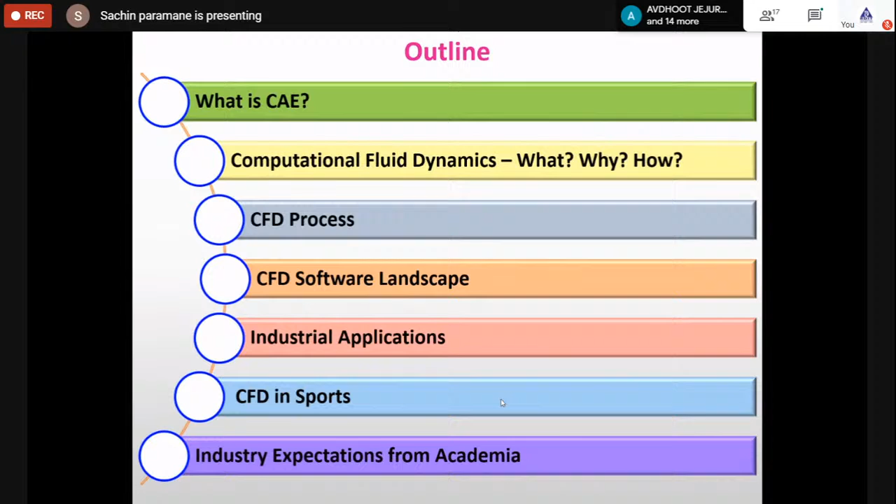I'll be happy to answer those queries, and that will be the end of the presentation. I will try to cover this in 1 hour 10 minutes, and then we'll have the question answers. So first, what is CAE?

Basically, CAE is a technology which is concerned with the use of computer systems to analyze CAD geometry, allowing designers to simulate and study how the product will behave, so that the design can be validated, refined, and optimized.

CAE is nothing but the use of computational resources, computational systems to model the geometry, analyze, simulate, and understand the behavior of the product in particular conditions, or particular environmental or operating conditions in which this product will be used. So this is nothing but CAE.

Nowadays CAE is an integral part of any product development cycle. If you talk about any industry, CAE plays a major role in the product development cycle, where CAE is applied for improving the performance of an existing product or designing a new product. The design is validated on computer, then taken for prototyping, and finally launched in the market. So this is the product development cycle. You can name any product where CAE is used on a large scale.

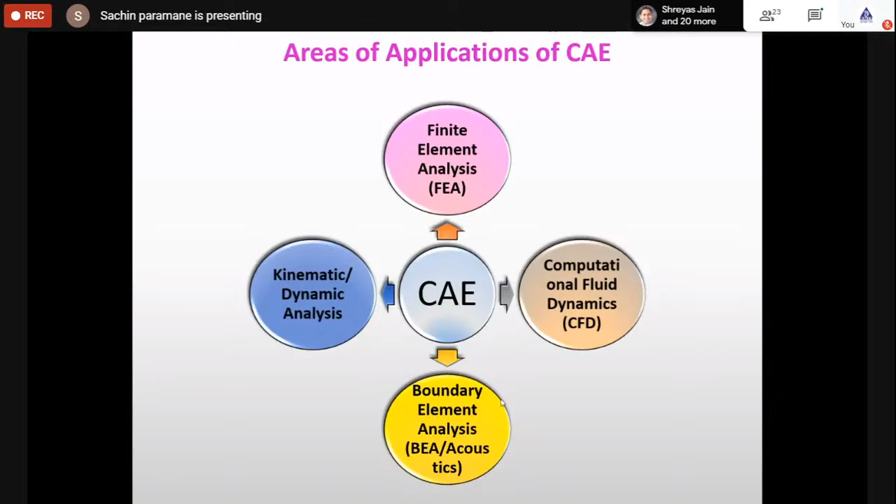So these are the broad areas of application of CAE. In this presentation, I would like to touch upon one part, that is computational fluid dynamics. First, we need to understand what computational fluid dynamics is.

If we see the definition in the book by Versteeg and Malalasekera, it states that CFD is the analysis of systems involving fluid flow, heat transfer, and associated phenomena such as chemical reactions, by means of computer-based simulation. So computer-based simulations are used to study different phenomena associated with fluid flow, heat transfer, and mass transfer.

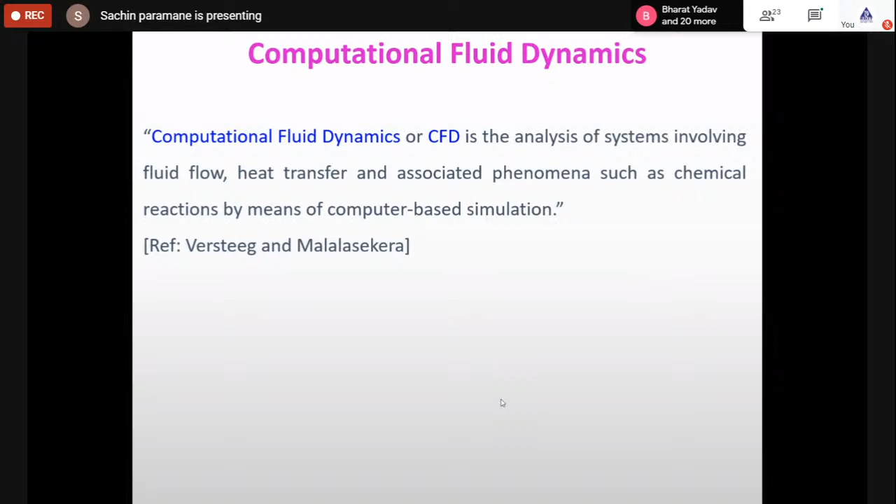Another definition, in the book by Professor Atul Sharma, Introduction to CFD, states that CFD is a theoretical method of scientific and engineering investigation concerned with the development and application of a video-camera-like tool - a software which is used to analyze fluid dynamics as well as heat and mass transfer problems in a unified way. Basically, it is a software which is just like a video-camera-like tool used for studying the different phenomena associated with fluid dynamics and heat transfer.

Here the software is like a virtual video camera, and the result is a movie where each picture gives fluid dynamics information - flow properties such as velocity, pressure, temperature, and turbulence kinetic energy, etc. These are the parameters shown in a picture. When we combine these pictures in a sequential, time-based manner, it creates a movie, which is nothing but an animation, as seen in different CFD analyses.

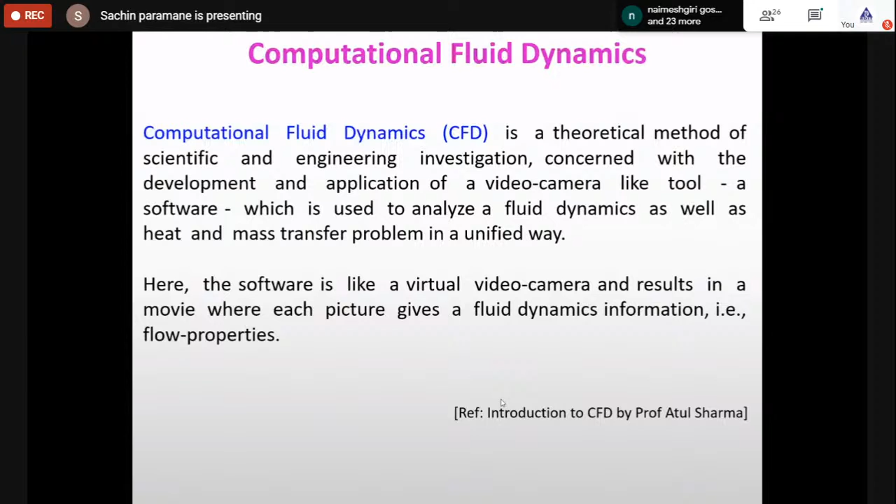Now, in order to understand computational fluid dynamics, we need to have understanding of three branches of science and engineering. First is engineering fluid dynamics. We should know basic engineering fluid dynamics, different laws, fluid dynamics properties. All these things need to be understood. Navier-Stokes equations, then the terms in those Navier-Stokes equations, those need to be understood thoroughly in engineering fluid dynamics. Then different concepts also we need to have understanding of.

Second is the mathematics. Basically, mathematics is used for understanding the partial differential equation, vector algebra, vectors, and other mathematical theorems, Gauss theorem, curl, divergence. All those understanding of these concepts are necessary to understand the CFD.

And third is nothing but computer science. Computer science, I mean to say, is to solve this governing partial differential equation, we need to understand the coding language, or we need to do coding for the analysis or solving this equation. So we need to have understanding of any computer coding language, be it MATLAB, C Sharp, C, Python, any computer language, Fortran, etc. So this language, understanding of this language and coding is required for the CFD analysis. This means when we are developing our own code, then this is very much required.

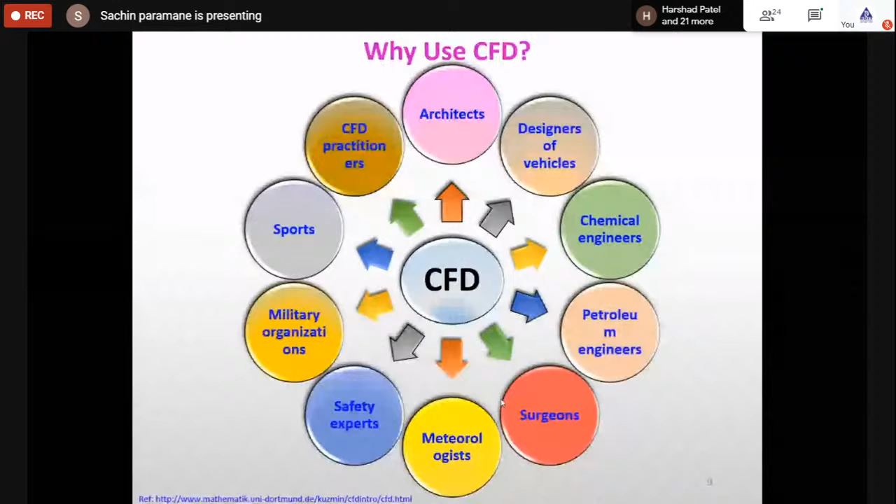Now, next is if we compare experiment versus simulations. So basically, first point you have to understand is, as a rule, CFD does not replace the measurements completely, but the amount of experimentation and prototyping and the overall cost can be significantly reduced. So if we plan to do experiments on different prototypes, then we have to make many number of prototypes. But here we can avoid that prototyping by creating different scenarios in our CFD simulations and study phenomena accordingly.

In experiments, quantitative description of flow is carried out using measurements, whereas in simulation, quantitative description of flow is done using CFD software. In experiments, one quantity is measured at a time, so the number of sensors determines the number of locations where we can measure. But in simulation, we can know all desired properties at any location inside the computational domain.

Experiments are limited by number of points and time instances, whereas in simulation we can do very high resolution simulation and determine any quantity at any location and at any instant of time.

Experiments are expensive in the sense we need laboratory, infrastructure, resources, manpower, electricity, measuring equipment, and the cost of sensors is also very high. It is also limited by the number of hours we can continue - if we have one shift, only 8 hours are useful for performing the experiments. But in simulation, you can run simulations overnight and still get results. So it is basically cheaper, except the cost of licenses, which are very expensive in case of CFD.

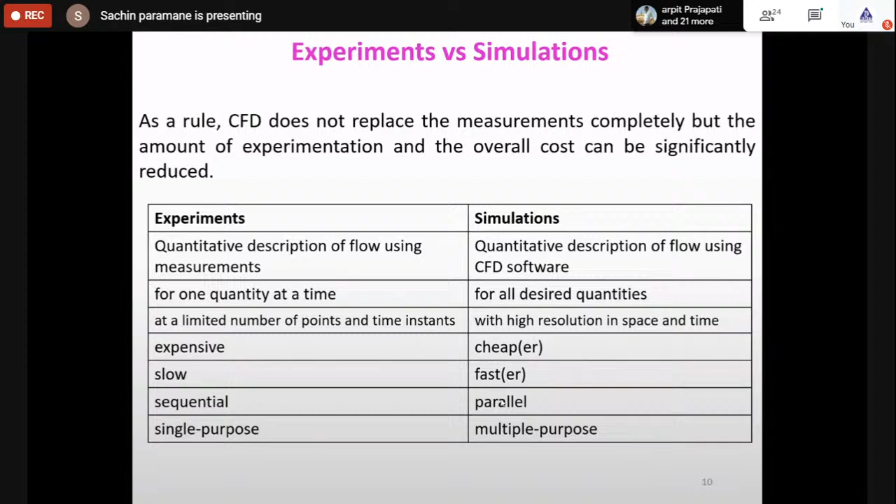Is it okay? Hello? Yes sir, okay yeah. So yes, I think my pace is okay now. Yes sir, yes sir, it is fine. Yeah.

So now next part is the CFD process - how CFD is applied for analysis. Basically there are four steps in CFD analysis. First is geometry creation - whatever phenomena we want to analyze or study, we need to define the computational domain and create a geometry to analyze the particular phenomenon or product.

Second is pre-processing. Pre-processing is dividing the computational domain into small elements called cells or control volumes or nodes. This process of converting the computational domain into small control volumes is called meshing. So pre-processing is meshing and applying the boundary conditions - what boundary conditions this phenomenon requires. That comes into the pre-processing part.

Third part is the solver - here we actually solve those governing equations using the software. And finally is our post-processing, which is nothing but the analysis of results.

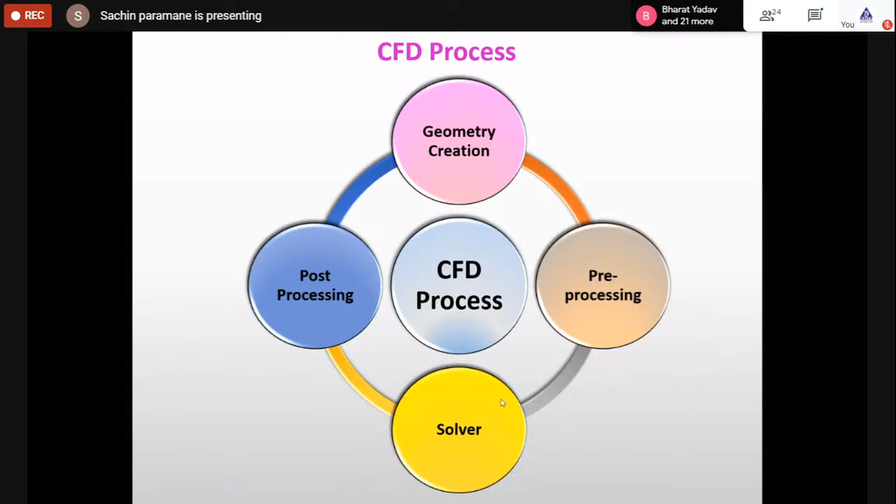Now, next topic is the landscape of CFD software - what CFD simulation software are available in the market, and how different industries are using this software.

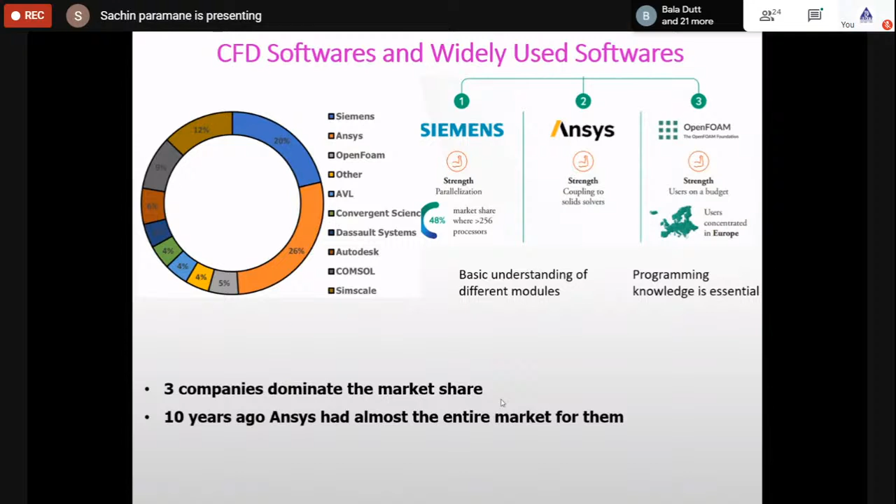Now, if we talk about CFD software workflow, as explained in the earlier slide, we have pre-processing, meshing, and post-processing. Pre-processing is nothing but 3D CAD import, cleanup, and use of CFD embedded geometry creation. If we take the example of ANSYS, they have SpaceClaim as a preprocessor, so it is inbuilt and integrated with CFD.

In meshing also, ANSYS has ICEM or Fluent meshing, which is integrated, and they have solving and post-processing, which is also integrated. So users are preferring CFD integrated preprocessor, mesher, as well as post-processor.

Then there are standalone software developed for a particular application, like AutoCAD or Creo, developed for CAD geometry or CAD modeling. If we talk about meshing, there are software like Pointwise, SnappyHexMesh, developed only for the meshing purpose.

Third is post-processing, like ParaView, EnSight, and Tecplot, software developed only for post-processing. So people will combine these softwares or use them individually for the CFD process.

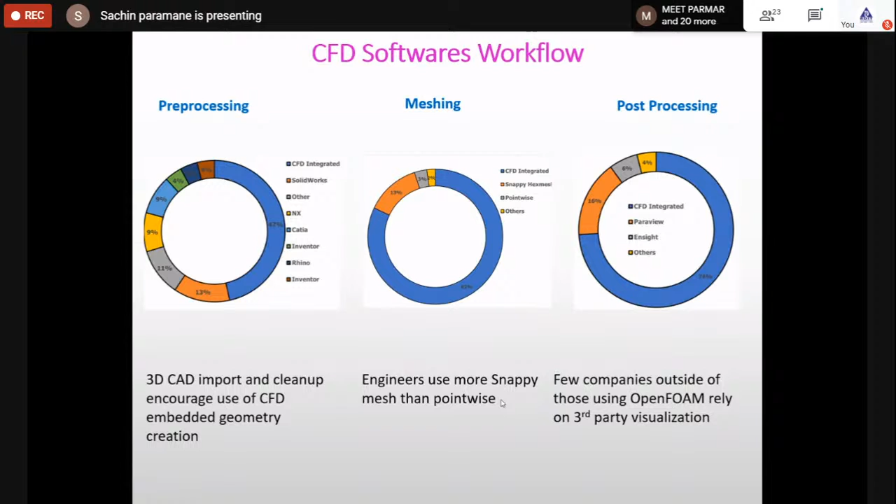For example, they will generate CAD geometry in Creo, import it into Pointwise where meshing is done, then import that mesh into a solver, and export the results for post-processing in different post-processors like ParaView or Tecplot. This is basically the CFD software workflow used in the industry.

After giving some introduction and usage of software for CFD analysis, I will take you through some industrial applications of computational fluid dynamics. First, I will talk about automotive applications. CFD in automotive applications is used in two broad areas: powertrain and non-powertrain.

Powertrain is nothing but the engine and transmission system; engine to transmission system is called powertrain, and everything else is non-powertrain application. The first application of CFD is external aerodynamics, to determine the shape of the vehicle or car, to reduce the drag coefficient, and to improve fuel economy by studying the external aerodynamics of the vehicle.

The next is passenger comfort. There is an HVAC system in every car—heating, ventilation, air, and air conditioning. Every passenger should feel comfortable when air conditioning is switched on. Automotive manufacturers use CFD to understand the airflow distribution inside the car—whether air from the louvers is reaching each passenger and achieving comfort with minimum time. So CFD is used to design the air conditioning system.

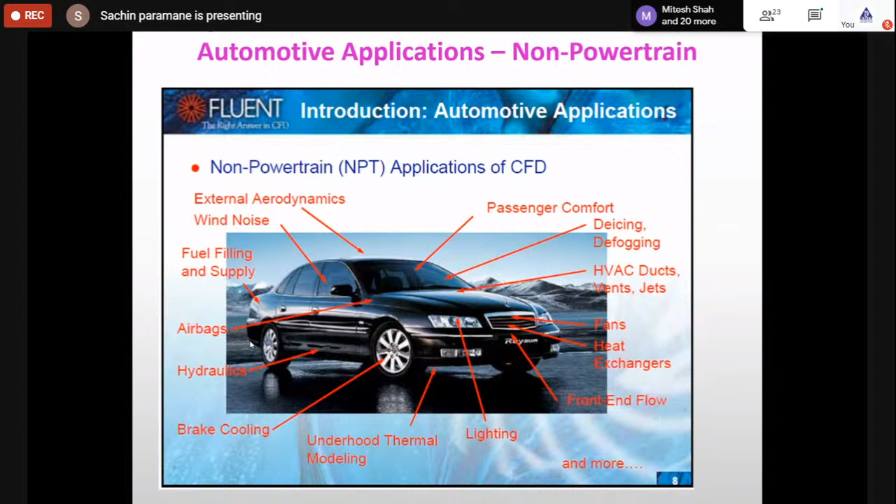Then we have pump for water flow and jacket cooling, air intake system, torque converter, clutches, transmission, exhaust after-treatment, and mufflers. So these are the areas where CFD is used in powertrain applications.

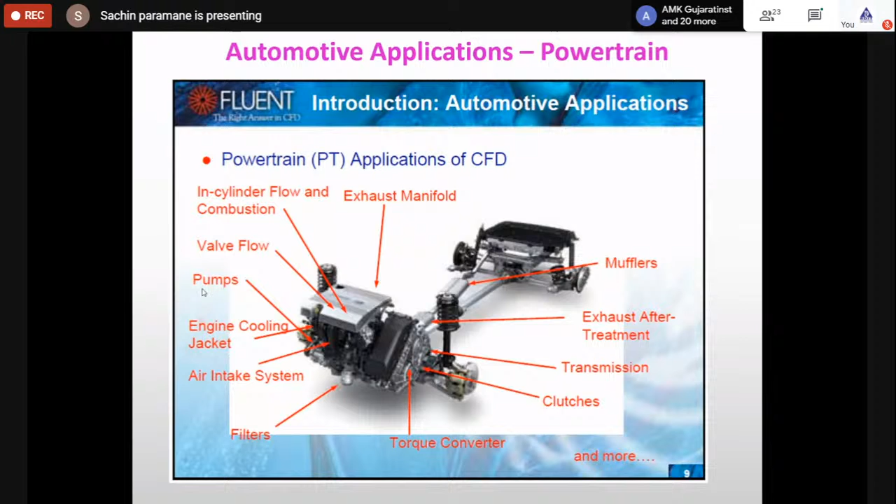Now I will take you through some of the external aerodynamics for the experimental side - how the experiments are performed in the wind tunnel to understand the airflow over the car.

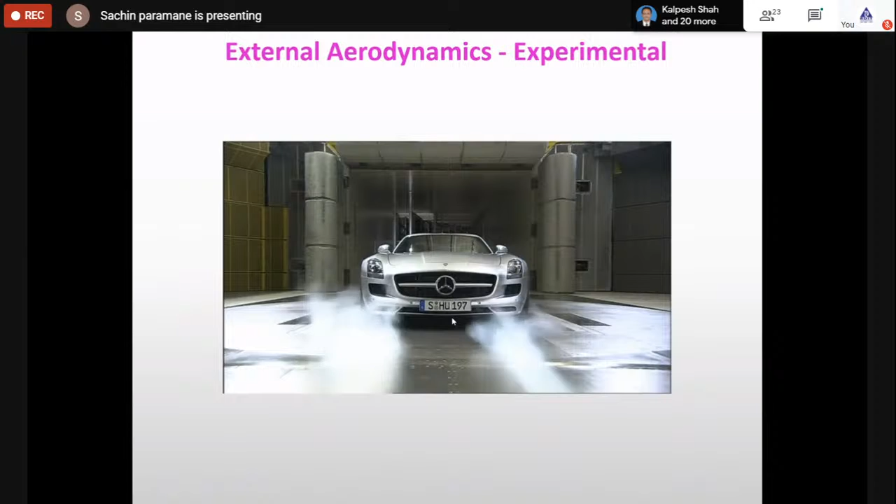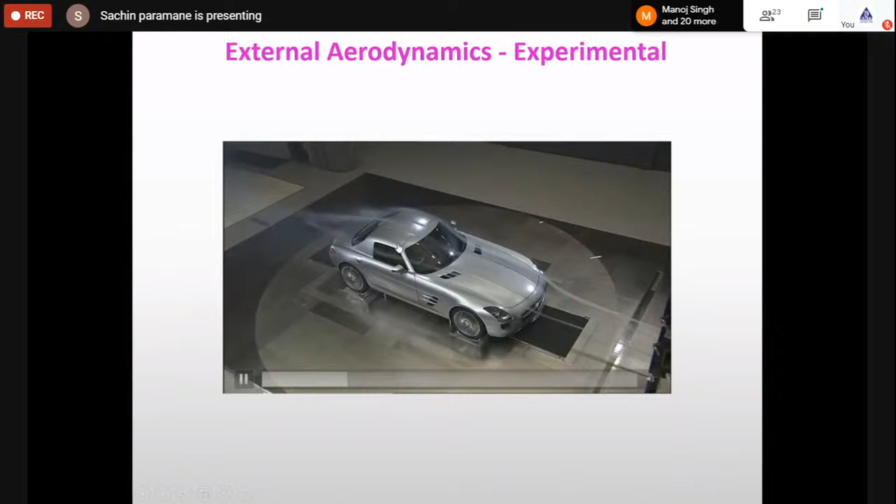This is an example of a Mercedes car where flow visualization is used to check any vortices or wake happening behind the car. That can be studied using flow visualization. These are the guns which provide the smoke, and any attachment or separation points are studied using this flow visualization.

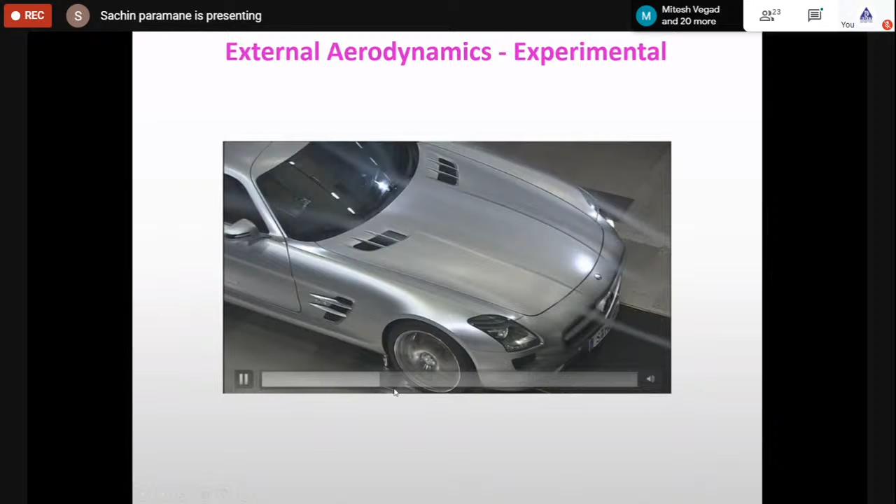In external aerodynamics, you can see how the flow is taking place over the car at different engine or vehicle speeds. There should be a smooth profile of the car so that we have a lower drag coefficient.

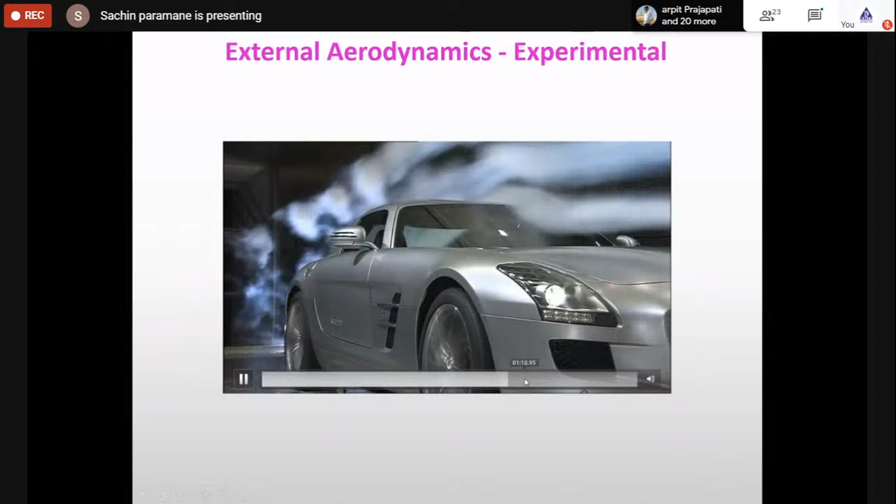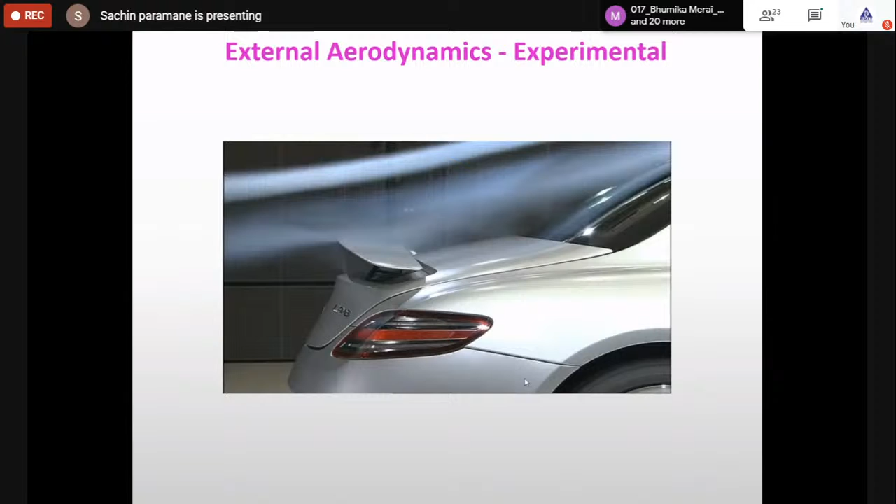Then design of the spoiler - when the spoiler is placed behind the car, how it will affect the aerodynamics can be studied using the experimental wind tunnel. So you can see how the flow is happening over the car spoiler.

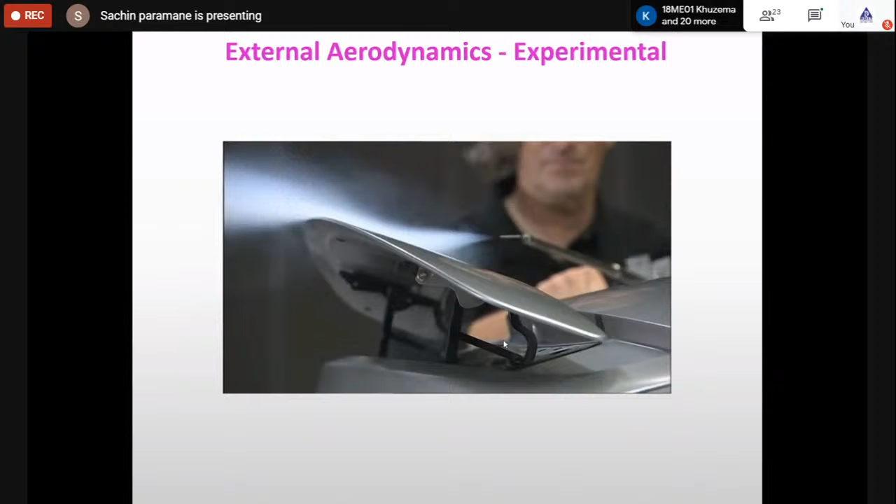Then the rear profile, and then you have the underbody profile, how there should be a smooth transition of the curvature. So this is one example of experiments in the wind tunnel for determining the shape of the car.

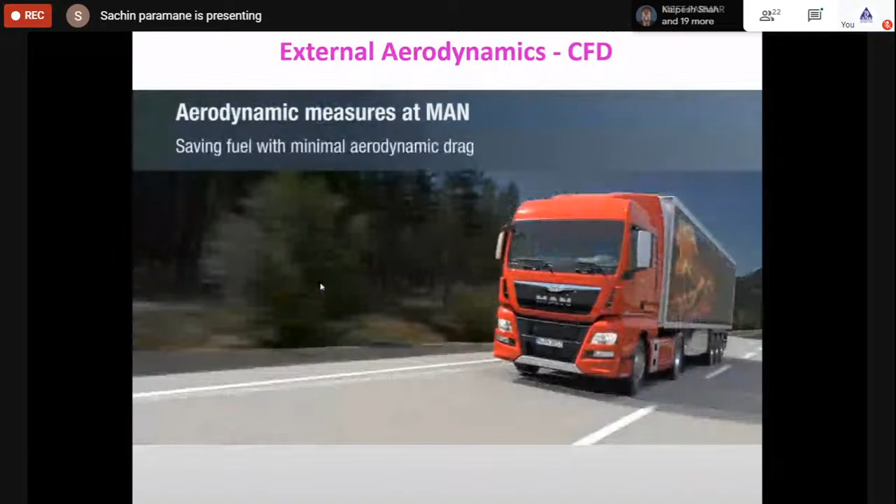Then this is one example of how CFD is used for external aerodynamics for trucks and buses - this is a MAN truck. The greater the front surface and the more edges a body has, the greater its air resistance. Because of this box-shaped front area, there is large air resistance.

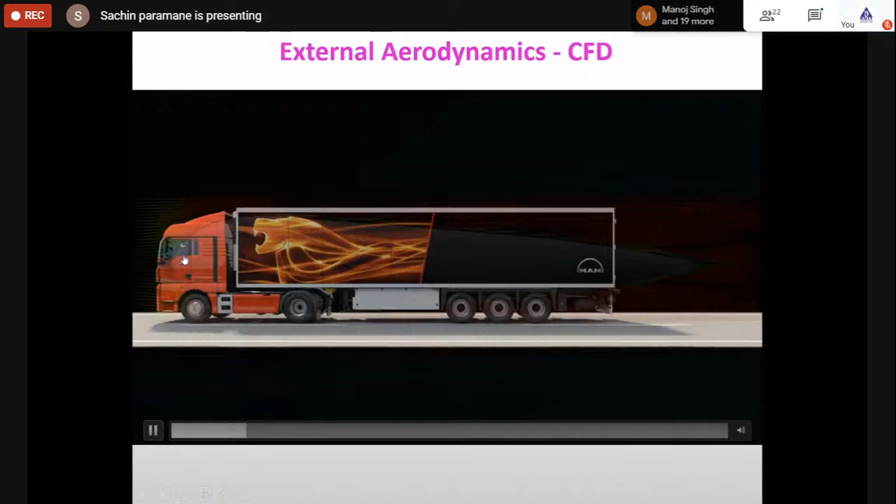The shape found in birds, for example, is ideal. So if the shape is modified according to an aerodynamic shape, it will reduce the drag resistance. Doubling the speed results in a fourfold increase in air resistance. Thus, at a speed of 85 kilometers per hour, 40% of the overall resistance is already generated through air resistance alone, since a fourfold increase in drag occurs as speed increases.

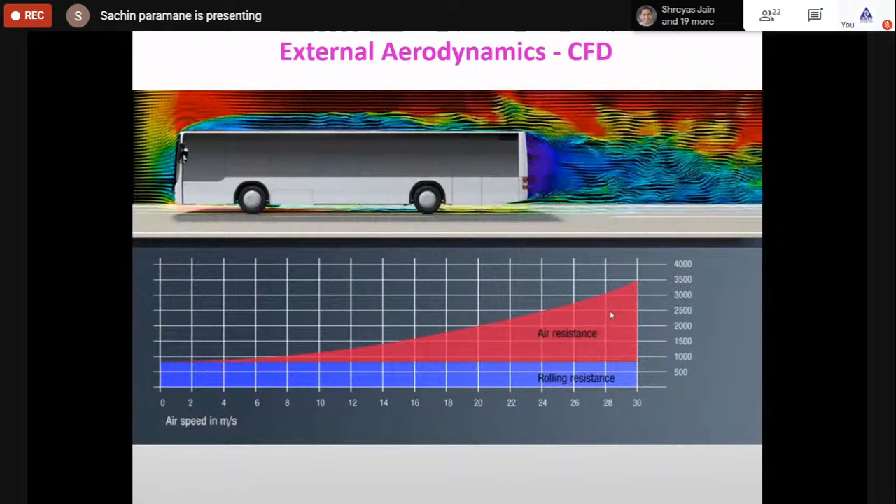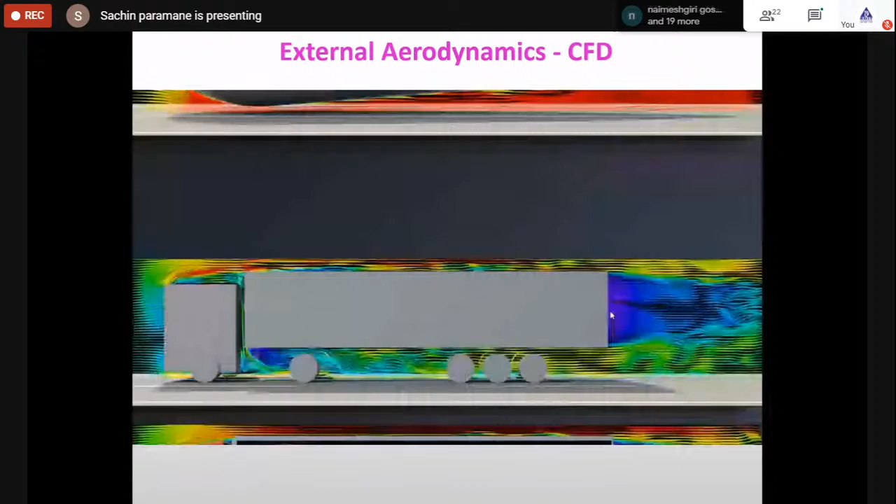Rounded edges at the front - now, how this CFD is used to modify the box shape design to reduce the drag and air resistance. The aerodynamic potential that can be achieved, without taking into consideration legal framework conditions, is demonstrated by the example of the MAN Concept S future development.

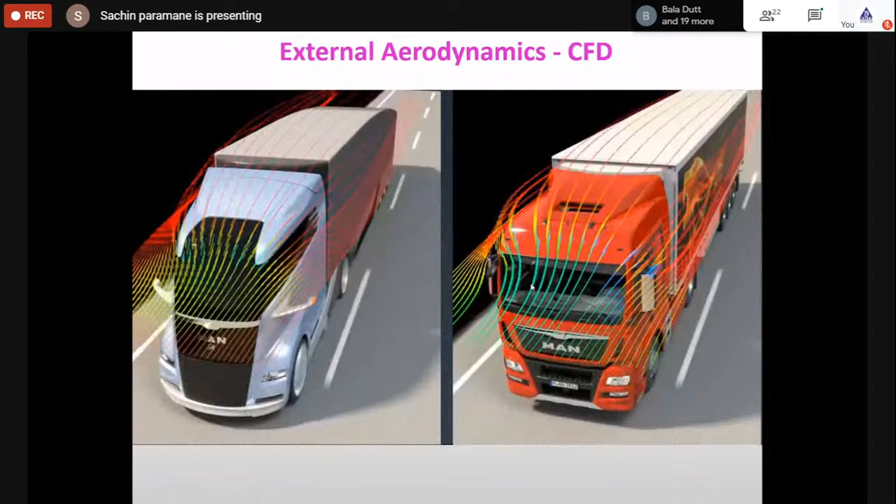So you can see just by changing the shape of the truck, the key features are: adaptation of the tractor machine and semi-trailer as a single unit with an aerodynamically ideal shape, reduction of pressure on the front of the vehicle, extensive side and underbody paneling, and protruding components minimized - for example, the mirror is replaced by a camera, since the mirror also acts as a source of resistance.

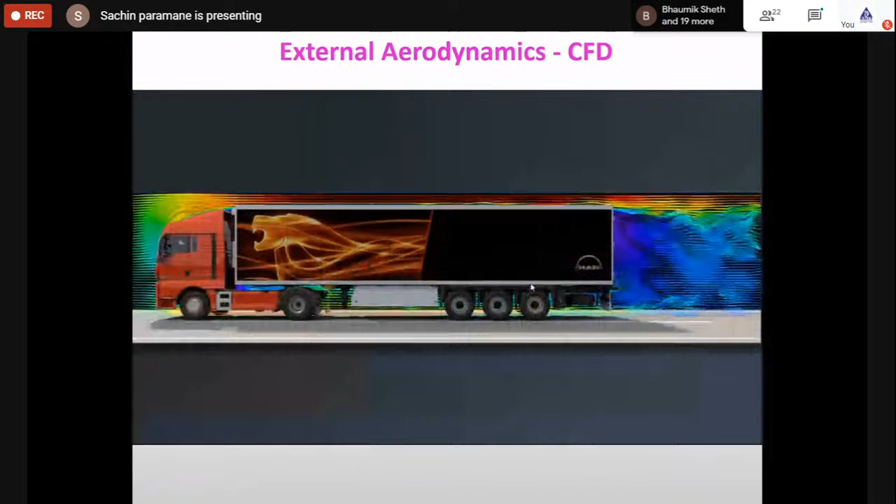Through optimization of the cab shape, it has been possible to reduce the air resistance for the TGX by around 4% compared with the previous TGA model.

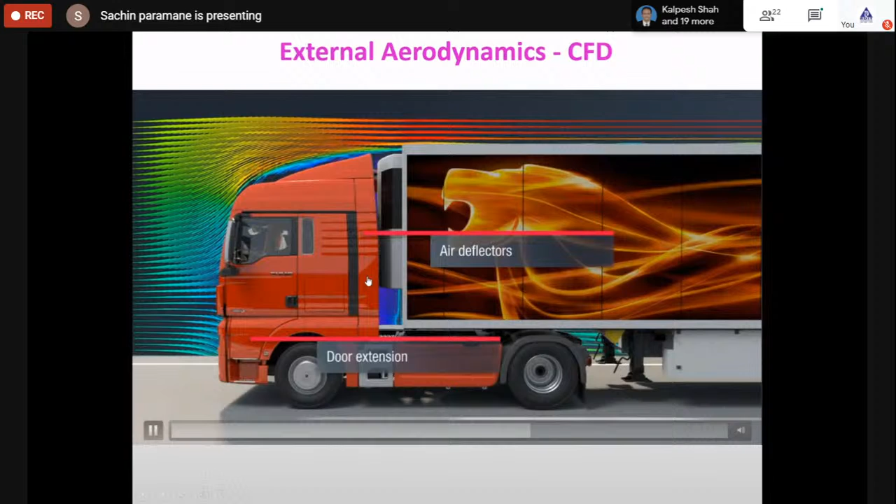So by just providing here a roof spoiler with adjustment, there is a lowering of the increase in drag in this area.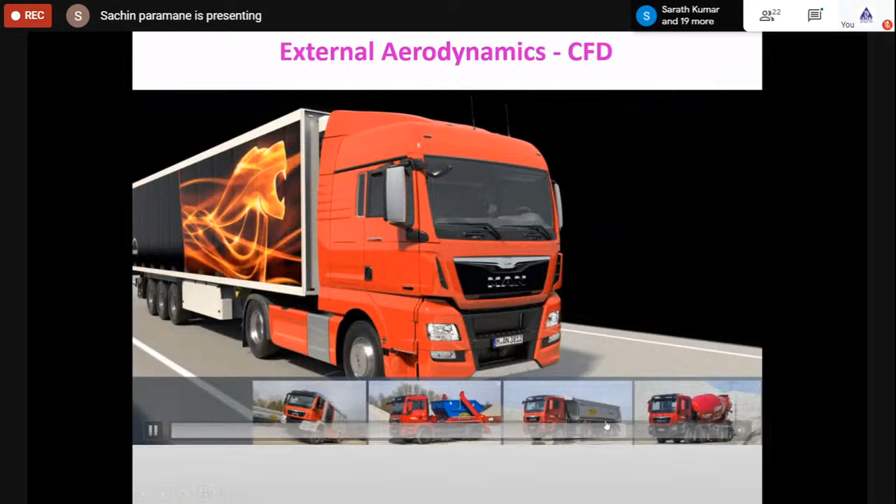In the further process, the side contour of the semi-trailer and the cab front in particular offer potential for reductions. Then there is a modified design of the bumpers, such as tipper troughs and supporters. So this is a way how CFD is used for external aerodynamics.

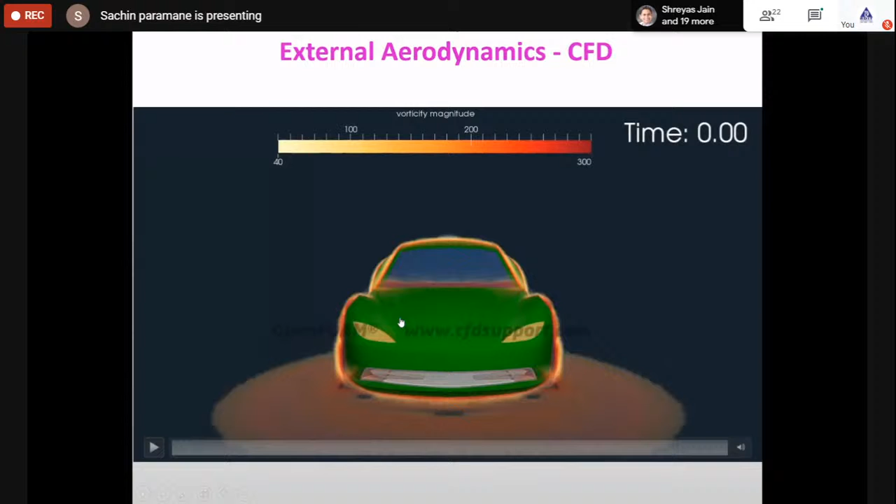Then we have another example of how vorticity and flow visualizations can be used to study better aerodynamic cars or concept cars. So this is just the vorticity contours over a car, and you can see the picture of how these are used for the better design of the vehicles.

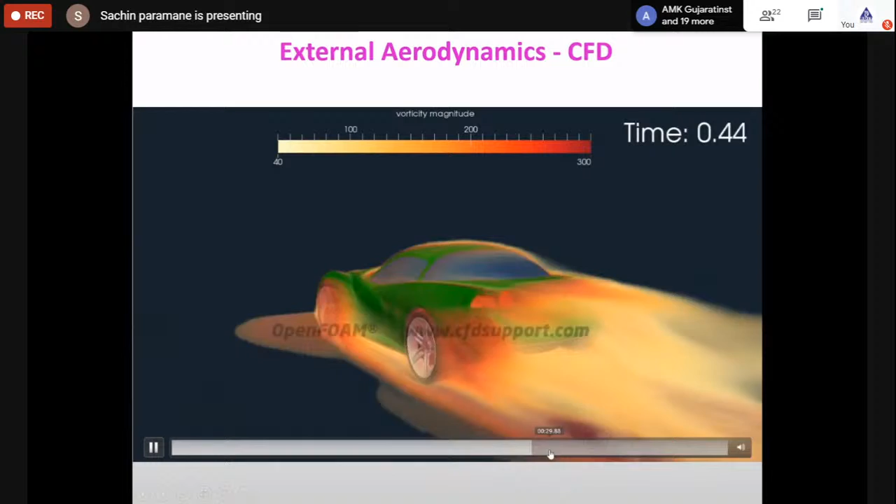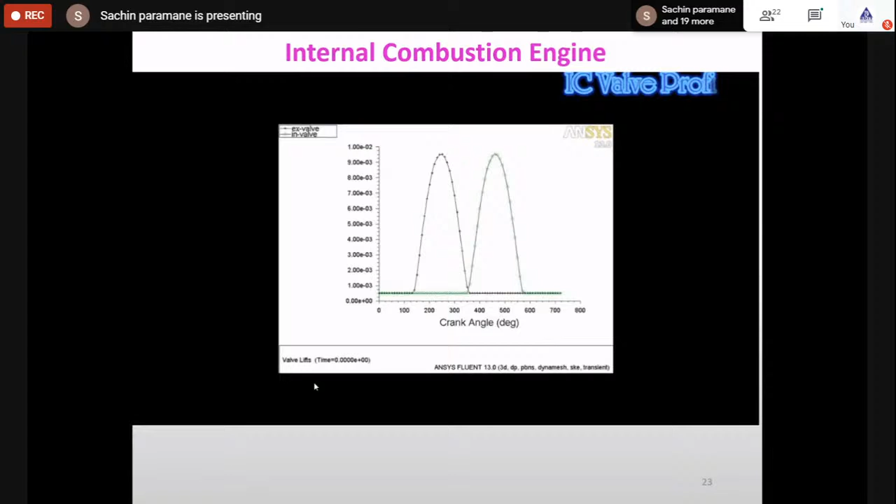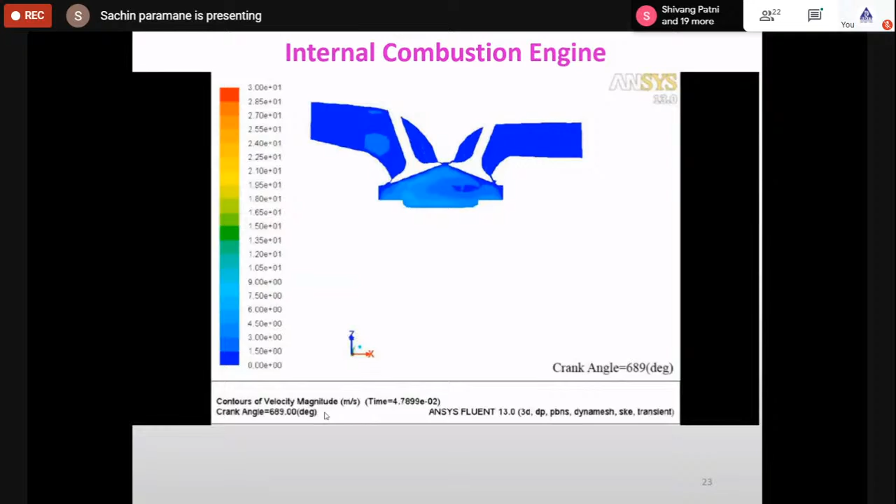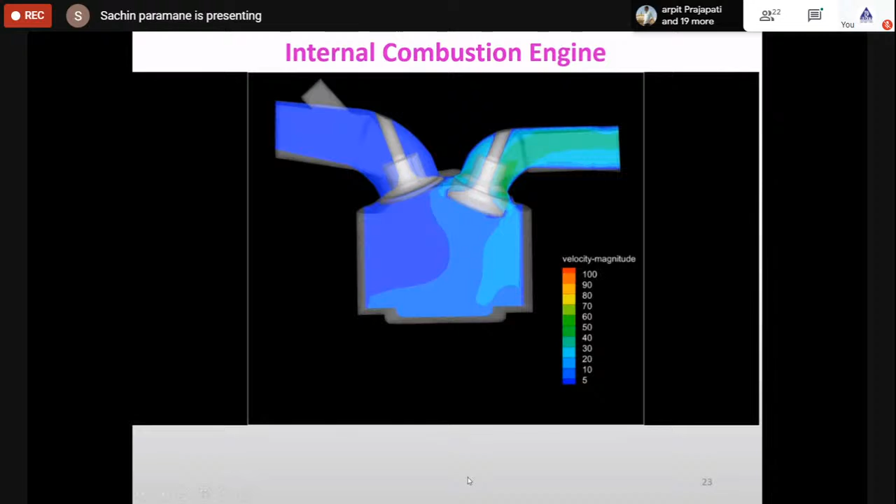Then for internal combustion engine, CFD is used for the study of the intake manifold and exhaust manifold. These are the cold flow simulations, meaning how the air fuel mixture is taken inside the combustion chamber. This is a velocity magnitude showing how, when piston movement happens, this mixture is taken inside and then exhausted through the exhaust manifold. This will help in better design of valve timing as well as combustion chamber design and location of the valves. This can be optimized using CFD.

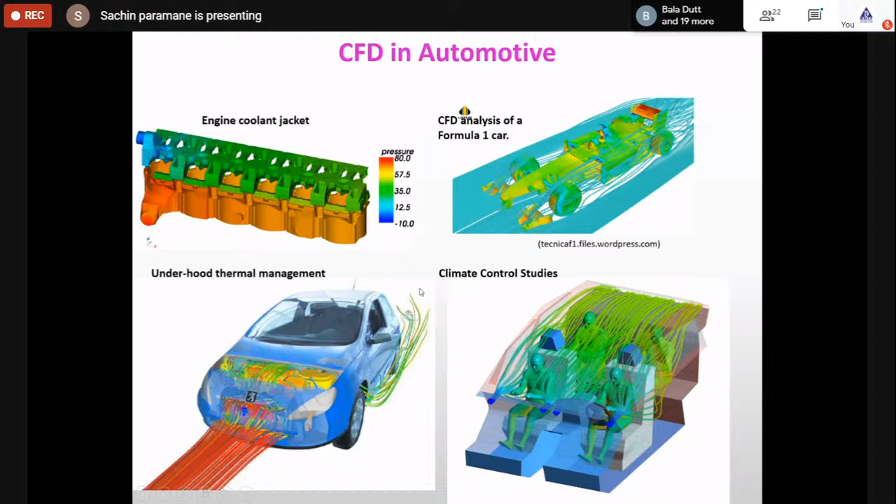Apart from this, we have other applications like engine coolant jacket simulation, under hood thermal management, Formula One car external aerodynamics, and climate control studies. These are the applications of CFD in the automotive industry.

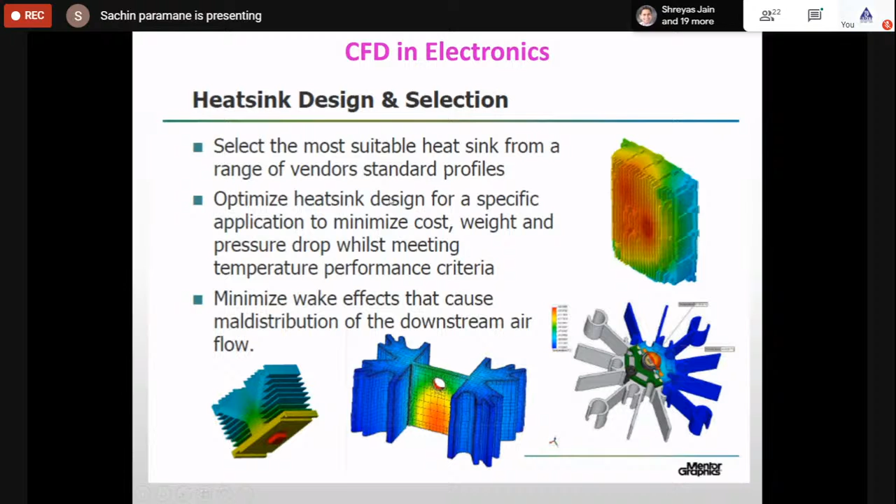Now, how is CFD used in the electronics industry? CFD is basically used for better heat dissipation from the electronics circuit. Nowadays, as our power requirements are going up, there is a lot of heat dissipation in the circuits. Circuits are becoming smaller, whereas heat dissipation requirements are increasing day by day. So to dissipate this heat very effectively, we need better design of heat sinks, then heat pipes. These are the products useful for dissipating heat from the electronics component. So in order to optimize heatsink design and fan design in the electronic circuit, CFD is used. This is one of the examples of how CFD is helpful for designing electronic components.

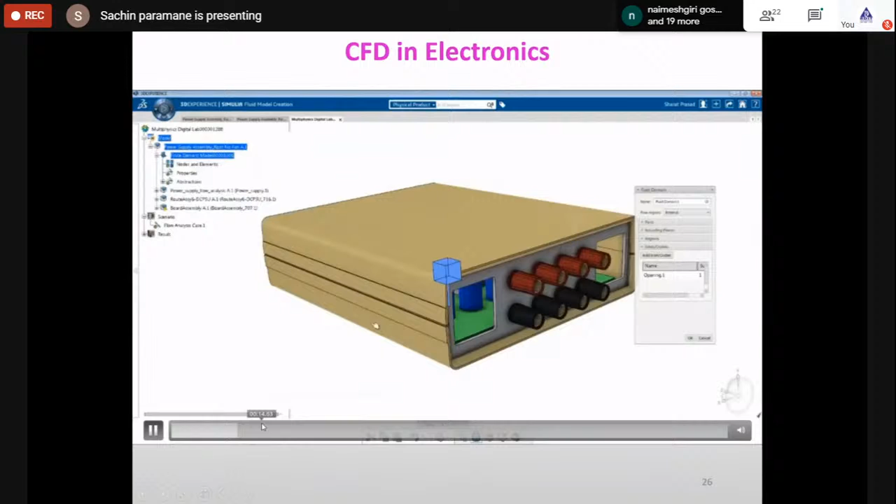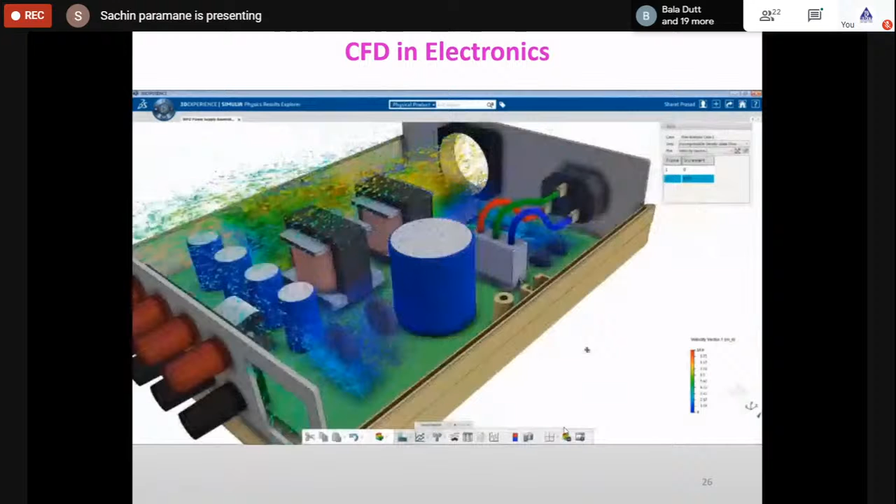So this is an electronic enclosure, and different components which are generating heat are modeled, and then fan locations, fan flow, etc. all are defined using boundary conditions. Then meshing is done, and simulations are performed to determine... these are the mesh for the electronic component, and this is how airflow distribution occurs over different components, and how heat is collected from these components by the air and then dissipated in the cooling.

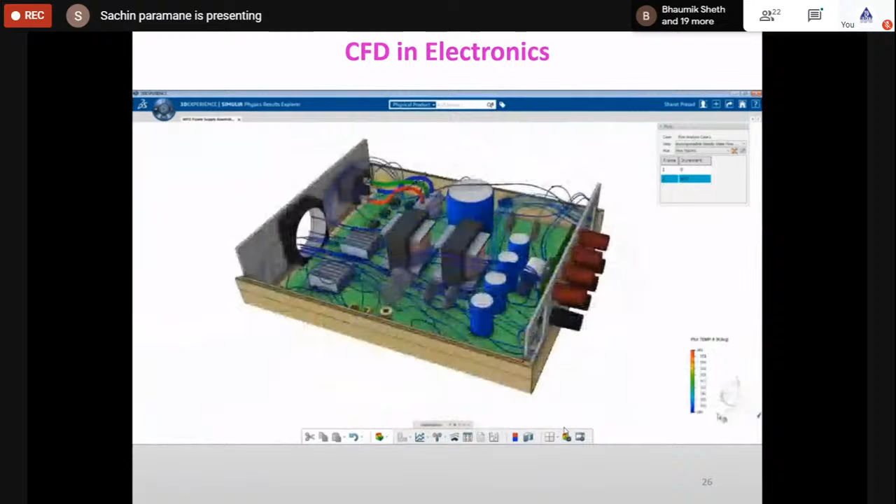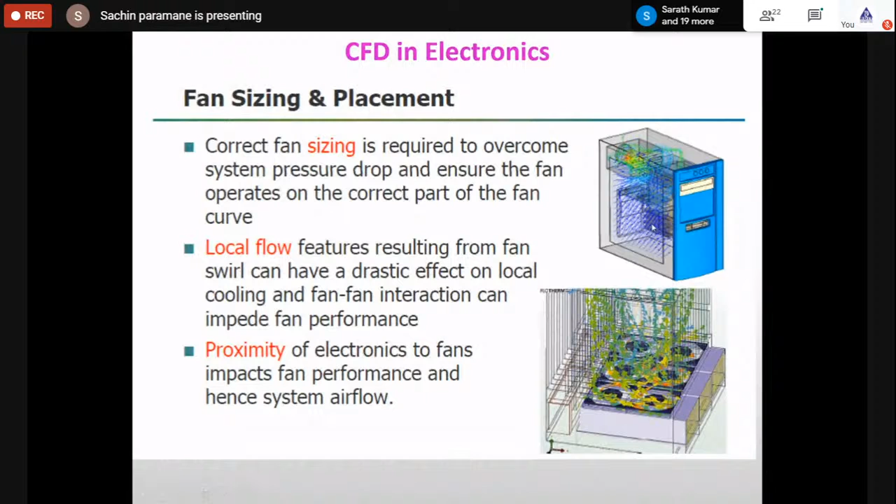Now, for placement of this component and optimization of different cases, we can use CFD, and select the best design useful for that particular application. So different scenarios can be studied on computer using CFD analysis, and we can select the best scenario which will help better heat dissipation. These are the applications of CFD in industry: enclosure design, flow design, fan placement, fan sizing, airflow optimization. So this is where CFD is used in the electronics industry.

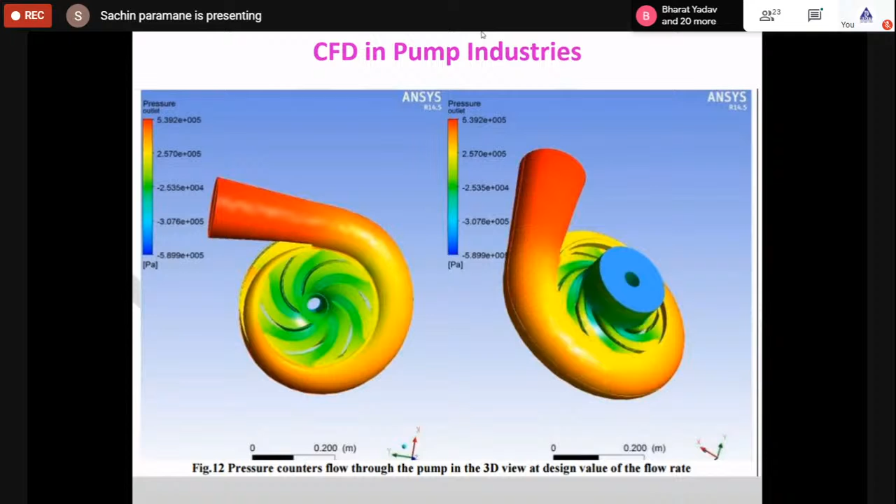Then, as you may be knowing, in pump industries, to determine the performance curves of pumps or fans, we can use CFD because every time we cannot do experiments. Suppose if we design higher capacity pumps and we don't have the experimental facility in-house to test those pumps, then here we can use CFD analysis to evaluate the performance of the pump, or to design the volute, impeller, casing. All those designs can be done, and performance can be checked using CFD analysis, and the best possible design can be used for the actual prototype and supply.

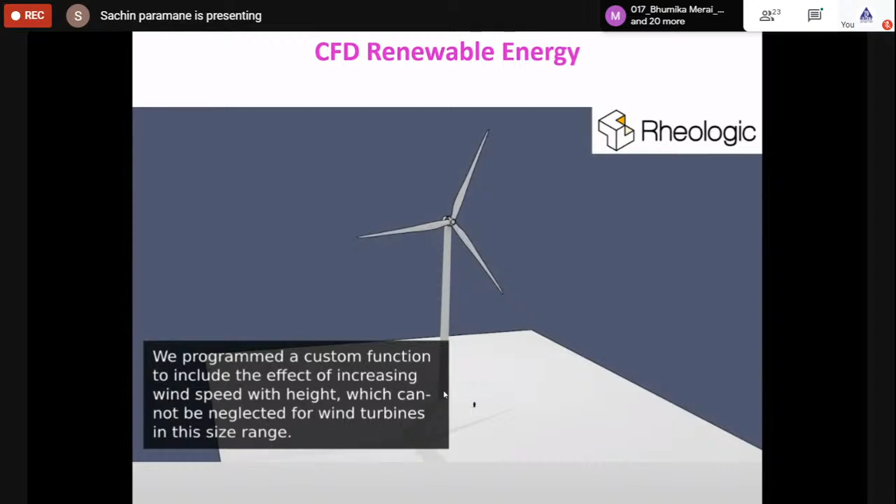So this is one example of how we use it. This is a wind turbine for a 2.3 megawatt power plant, onshore. It has a diameter of around 80 meters, and height is 80 meters. The center of the wind turbine is at 80 meters, and CFD analysis was performed over the wind turbine.

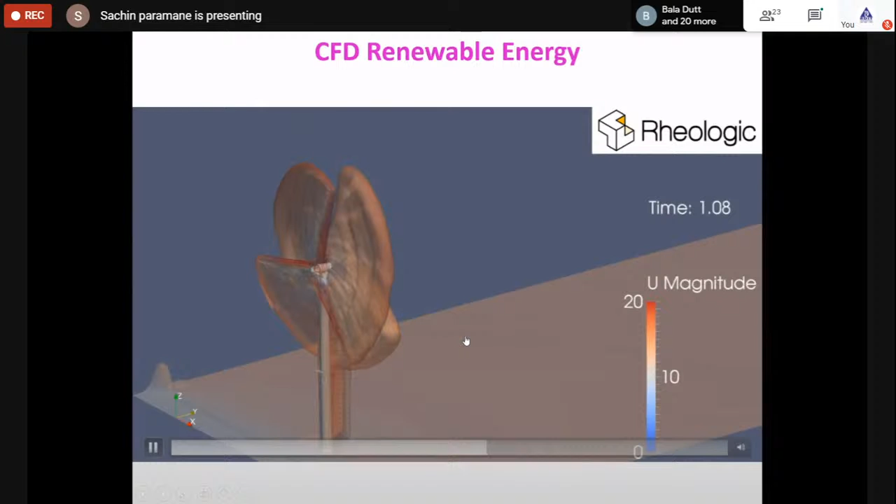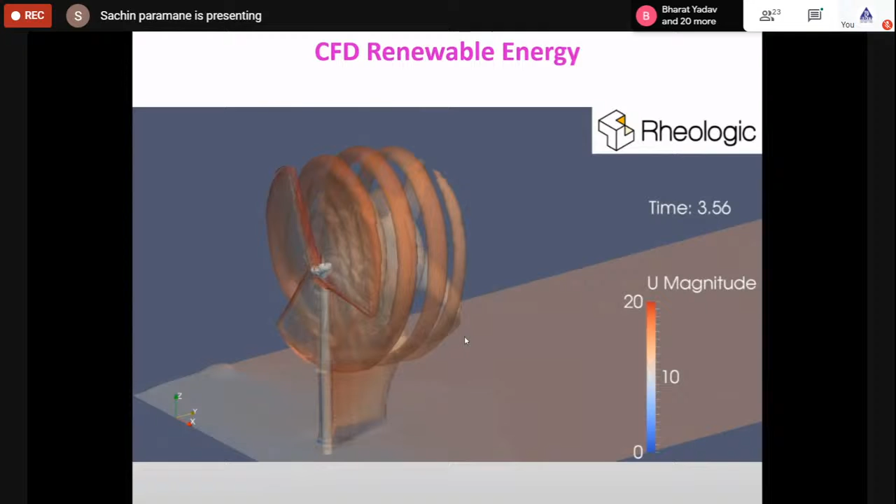So this is the magnitude vortices which are formed when the wind turbine rotates. Now we can place the wind turbine which is not within this vortices region, and this will give us the proper location of different wind turbines, and we can get the maximum yield from the wind turbine.

Then there is design of blades which will give us a better aerodynamic profile of the blades, and that will give us the lower drag coefficient, and will have a higher energy output from the wind turbines.

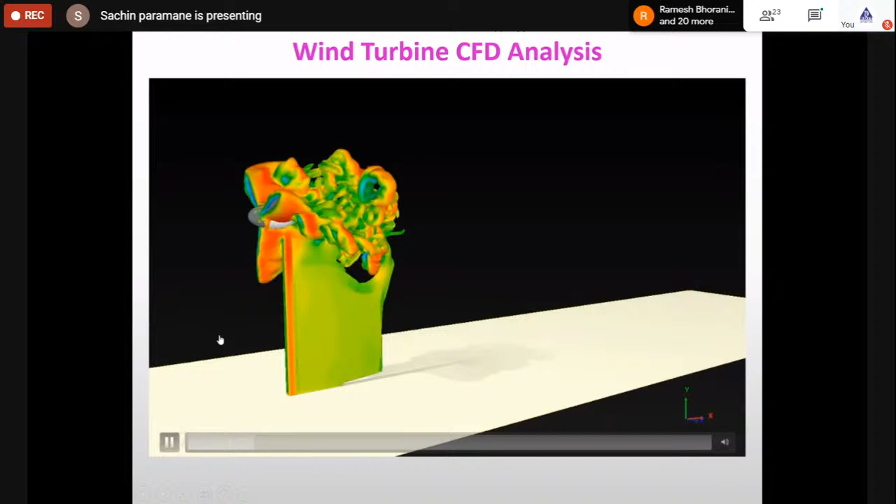And this is another example of how CFD is used to study the wake dynamics behind those wind turbines. So you can place the next wind turbine where the wakes are minimized.

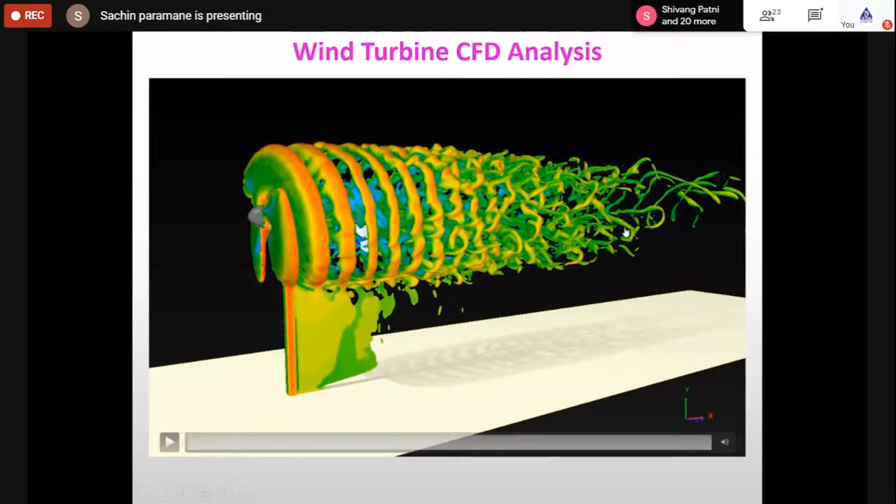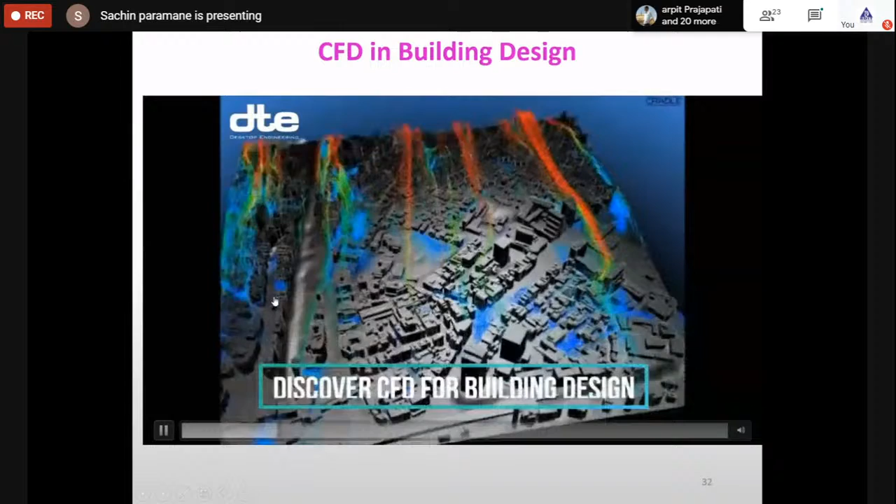Then CFD is again used in building design, designing of cities, to understand the existing building design, how the airflow will occur over the buildings, and if there is any harm for the structural design of the building if there are cyclones or very high velocity wind blowing over the buildings.

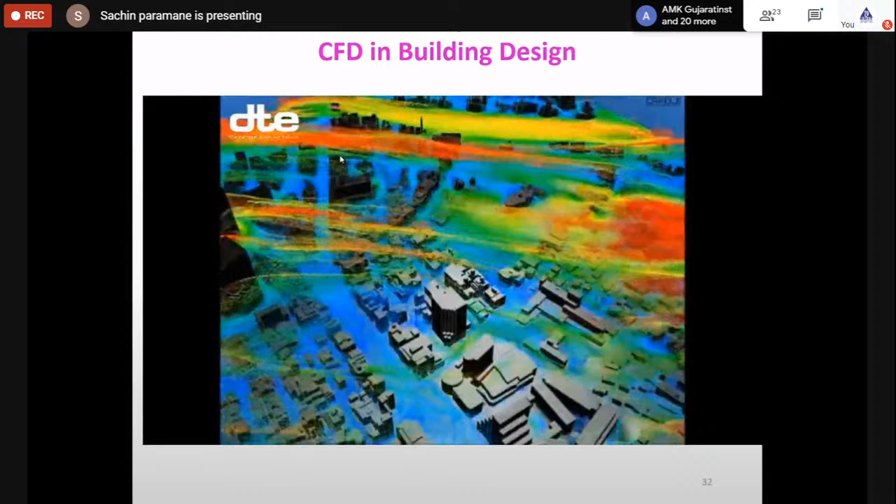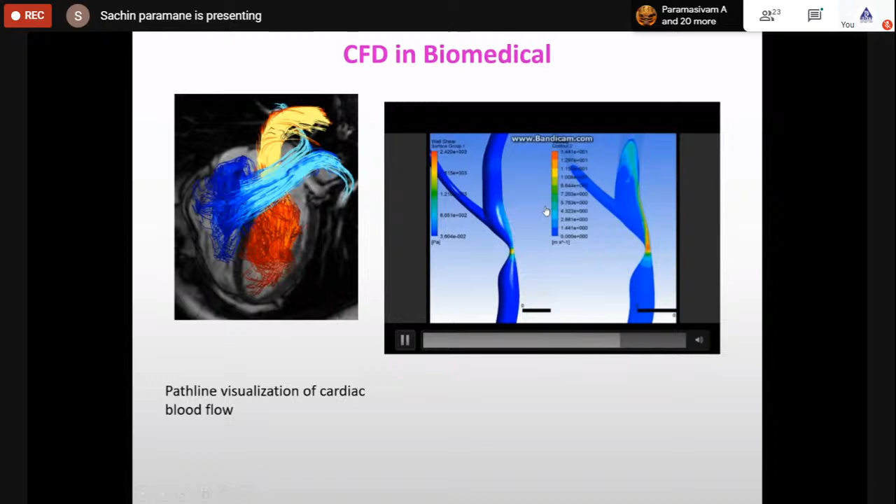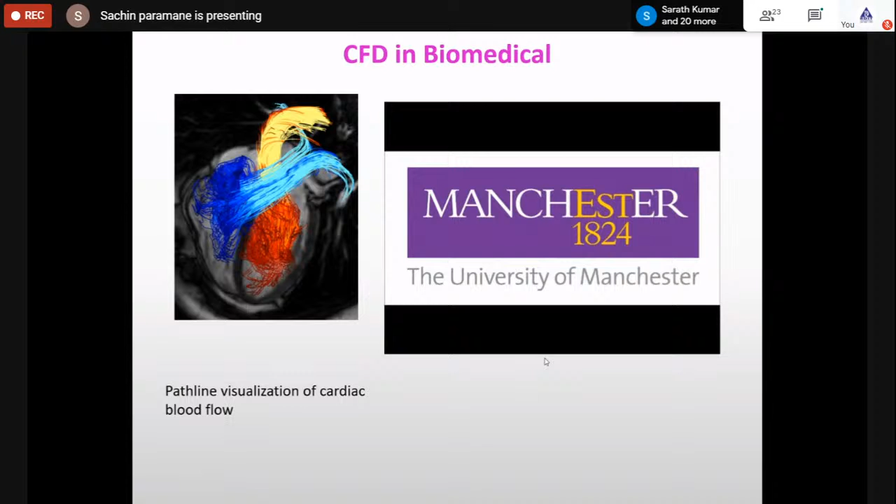So there is a blockage of the vein, which can be seen. Then if there is an 80% blockage, the blood flow can be seen. Depending upon the progression of the disease, medical surgeons can determine when to operate the patient, and the operations can be planned accordingly. So this can also be studied using CFD.

Now, in nature, you can see the direct applications of CFD, like bird flow, geese flow, and swimming of fish inside a lake or in water. The bird will fly, or the fish will swim in a particular way in a group, so that the next fish will have a lesser amount of drag, or they have to utilize minimum energy to swim in the water.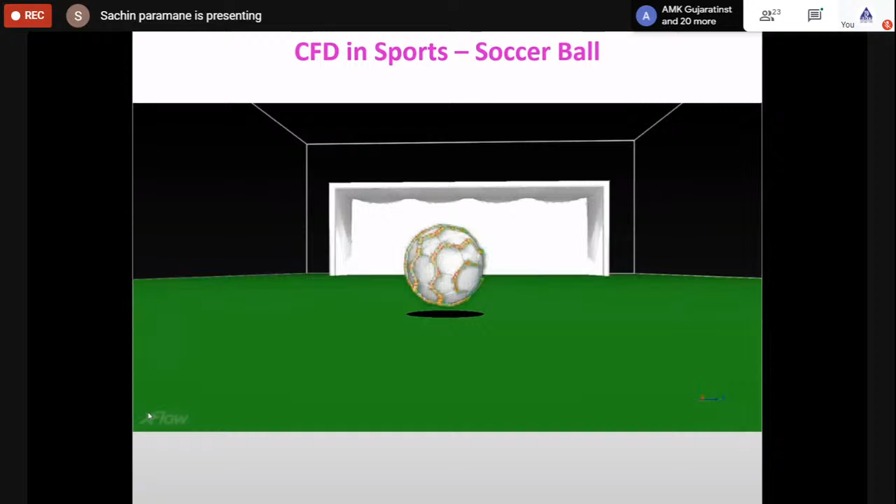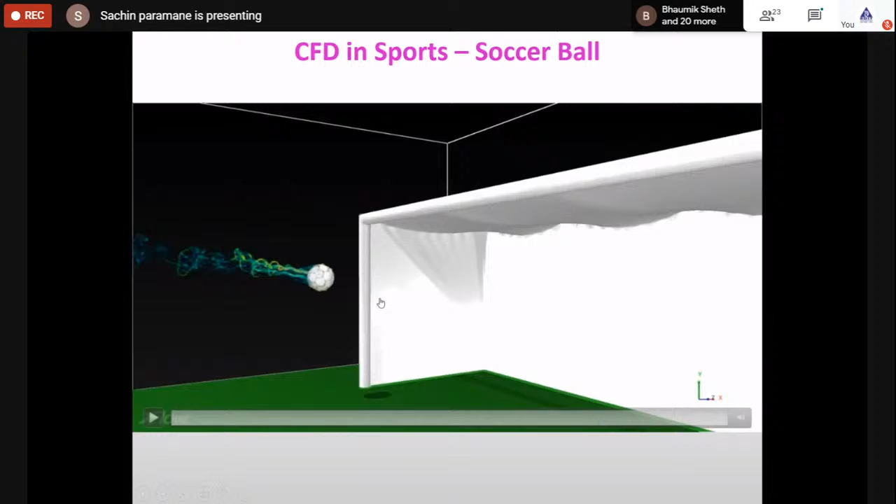So this is a soccer ball or football, and depending upon the flight of this football, it will take a particular direction depending upon the resistance. So this is nothing but flow over a sphere, and this is the wake found behind the football, and due to pressure difference at front and back, it will take a particular path, and this path is used to divert from the defender, and then a goal can be scored. So this is the idea behind studying the flow dynamics over the football.

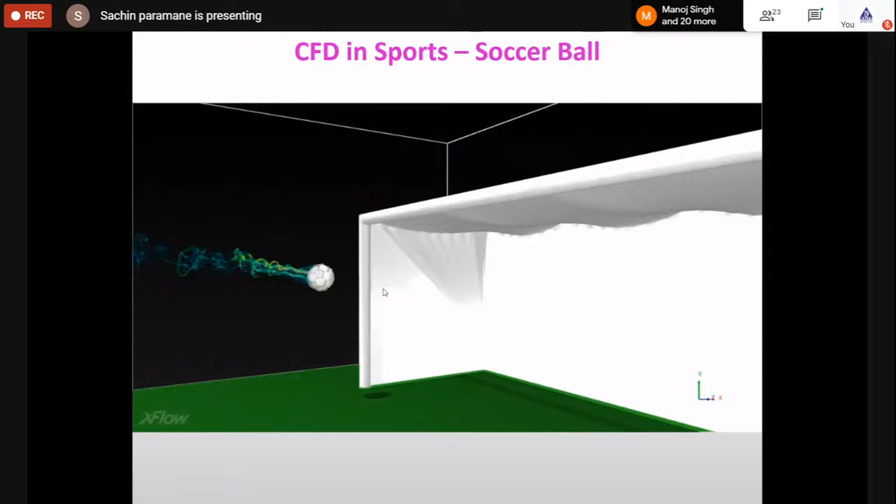Now you might have seen some famous free kicks. I will show you the free kick by Beckham against Greece. You can understand how the ball moves past these defenders, and the goal is scored due to this typical path of the ball. You can see there is a curved movement of the football, and the goal is scored. This is how they use this understanding to make use of these free kicks to score the goal.

Next one is from Roberto Carlos of Brazil, who scored a goal against France. This is another famous free kick. From a long distance, he scored this goal, and there was no large movement of the goalkeeper, even from such a long distance.

See the movement of the ball, so there is a complete curve. He has hit the kick in the right side, and then the ball has moved towards the left side. So there has been a case study again, how a goal has been scored from such a long distance, and how he has understood this flow dynamics or physics.

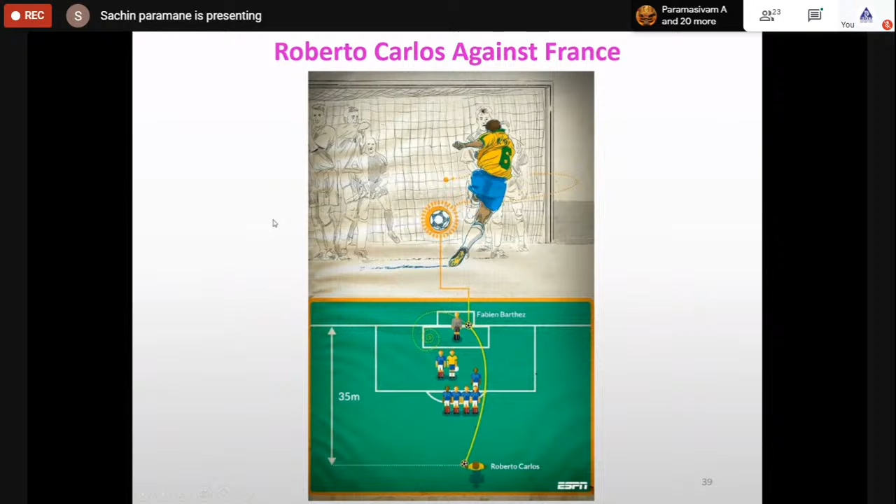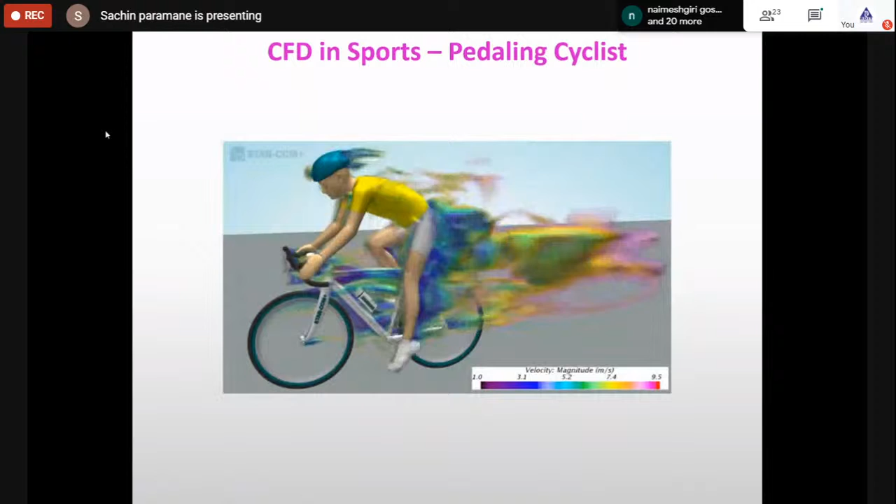Then another application is to understand the flow over the cyclist. When he pedals the bicycle, how there is airflow distribution over the person. Now you can see the cyclists are using aerodynamic profile helmets. These are used to reduce the drag and to reduce the energy required to move forward. So this is a simulation of how it has been used.

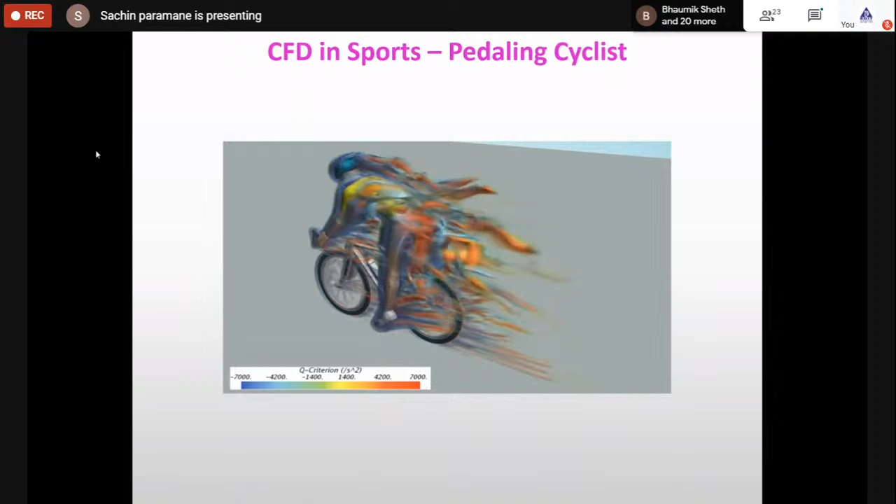Then, to reduce the effort required for swimming, the swimming cap has been designed in a hydrodynamic way so that it sticks to the head of the person, and he has to utilize less effort to swim. Then in cycling races, you might have seen that the person behind will try to go in the wake created by the person in front of him, so that he has to use less effort. So these are the ways people try to go behind the person running, swimming, or cycling in front of him, so he can utilize his energy for the last miles.

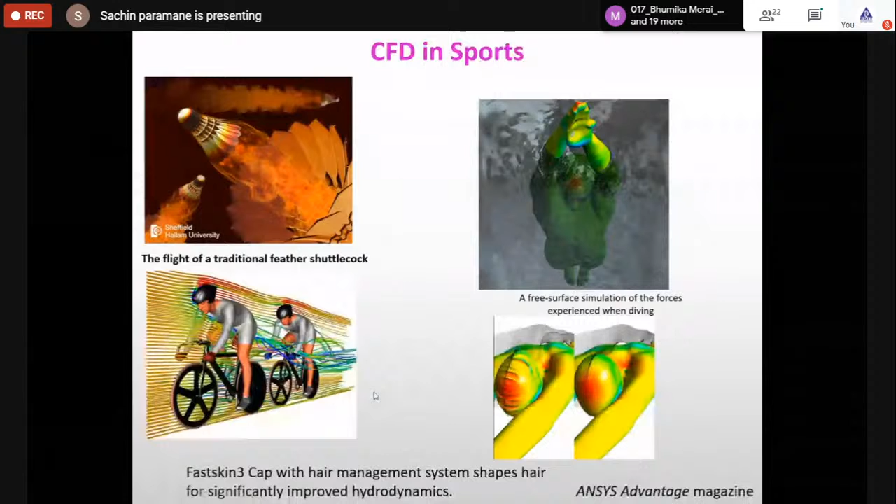Now I will take you through fluid dynamics in cricket.

This is nothing but application of fluid dynamics in cricket, that means to understand the reverse swing. I think many of us follow cricket, but we follow it just like that, meaning we just know how cricket is played. But if we try to go deeply inside some of these phenomena, I think you will really enjoy watching cricket in a more meaningful manner.

Now I want to introduce the concept of swing bowling. Some of you might know this, but I will explain in a different manner, going slightly deeper. Swing bowling is a skill in cricket that bowlers use to get batsmen out. It involves bowling the ball in such a way that it curves or swings in the air, and the process that causes this ball to swing can be explained through aerodynamics.

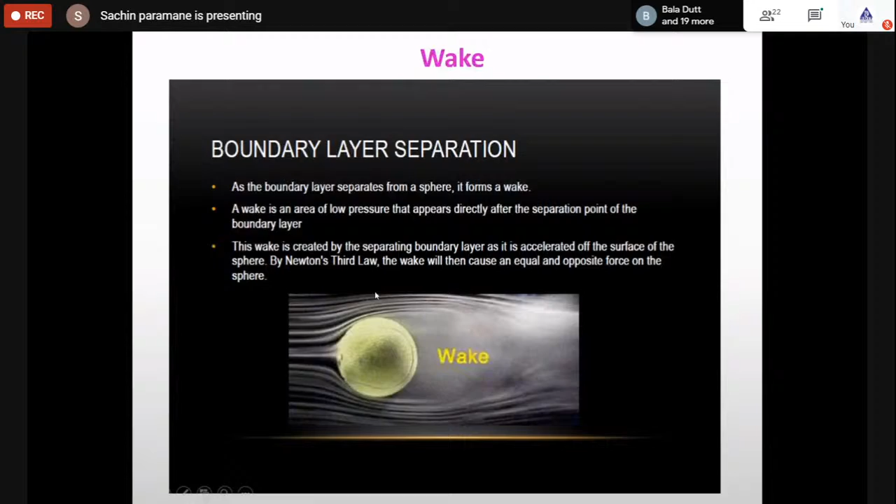It involves bowling a new cricket ball with the seam upright at a slight angle in the direction you wish the ball to swing. If I am the bowler and I want to bowl away from the batsman with a new ball, I will keep the seam position away from the batsman. So this is bowling using a new ball.

You might have also noticed that some bowlers hide the seam position. They put their finger on the seam so the batsman cannot make out the seam position and will not understand where the bowler is going to bowl the ball. This is how they try to avoid showing the seam position to the batsman.

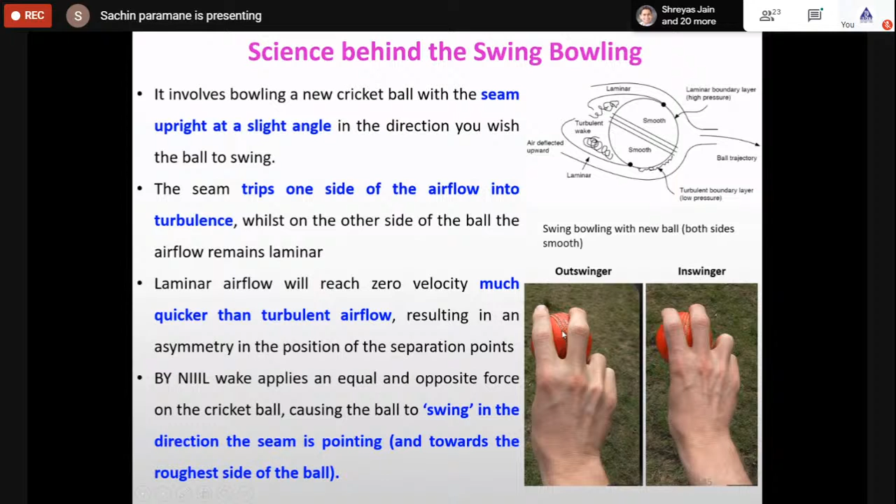Now, shining of the ball - you might have seen fielders rubbing the ball on their trousers, in Test cricket. You will often see fielders constantly shining one side of the ball by rubbing it on their trousers, making that side smooth. This rubbing helps maintain the smooth, shiny side, while the opposite side is left to normal wear and tear - so one side becomes smooth and the other rough.

Because of the fluid dynamics explained earlier, the ball will turn towards the rougher side. In simple terms, the aerodynamics of bowling means the shiny side travels faster through the air, while the rough side acts as a brake, pushing the ball in that direction. This is how they try to make one side shiny and the other rough.

About two years back, there was a ban on three Australian cricketers, mainly Smith and Warner. What they did was use emery paper to make one side of the ball rough - they hid the emery paper and were caught rubbing it on one side of the ball, to help the bowler generate swing and help the team. But in cricket this is not allowed - you cannot use external things to make the ball rough.

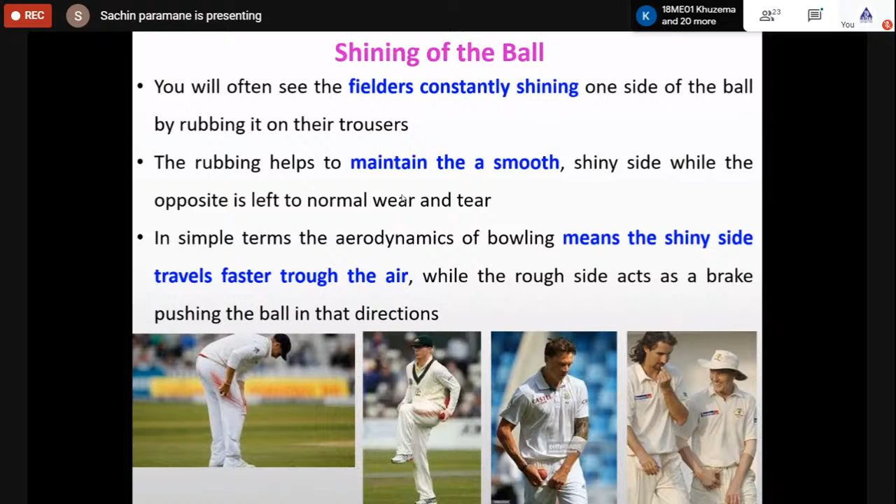In earlier days, Pakistani bowlers used to throw the ball on the boundaries so that the ball would get rough on one side. So that was also the case.

Sometimes entire cricket series have been decided by the ability of a team to get an older ball to reverse swing. That means an older ball is used to reverse swing, where a bowler can approach with the same bowling action but get the ball to move in a completely opposite direction. The difference between conventional and reverse swing lies in the difference in flow separation on each side of the ball for the same seam position, as the ball deteriorates during the game.

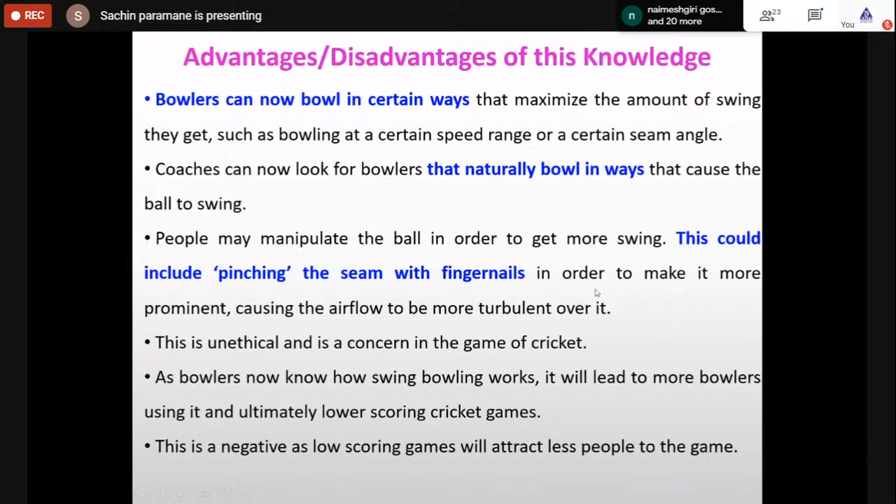Now, as bowlers know how swing bowling works, it will lead to more bowlers using it, and ultimately lower scoring cricket games. This is negative, as low scoring games will attract fewer people to the game. So cricket is a gentleman's game - play it with fairness and sportsmanship.

Now another quote I would like to share with you: 'A theory is something nobody believes except the person proposing the theory, and experiments are something everybody believes except the person doing the experiment' - from Albert Einstein. Basically, what he meant is whenever we do numerical analysis or CFD simulation, we should make people believe in our results. So we have to follow certain methodologies - understanding of boundary conditions, mesh independence study, domain independence study, time independence study. These are the studies needed so that people believe in our results or the theory we are proposing using simulations.

Now I'm coming towards the end of the presentation. There are certain expectations from the industry, from the new young generation joining the industry after passing out from colleges. Whatever project or work they do, there are three aspects - at least one of these aspects should be met.

First is whatever project or work they are doing, whether it is reducing cost in any way - by means of process, material, or design. If it is reducing the cost, industry will go for it. Second is whether it is improving the quality or reliability of the product - the process they are proposing should improve quality and reliability. Third is time - time required for manufacturing, assembly, or any process. If it is reducing that time, there is a way forward to implement that idea in the production system.

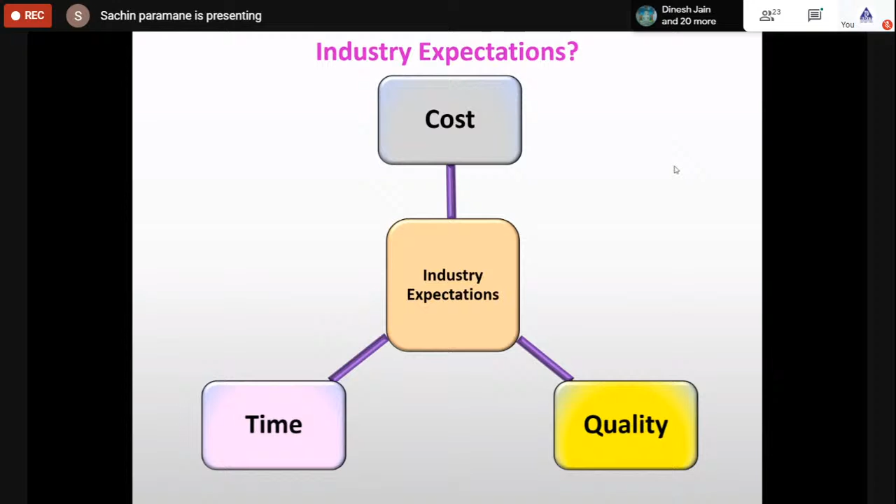So students should understand that whatever efforts they make should lead to at least one of these criteria for it to be naturally accepted by the industry. Now there are certain suggestions which I would like to propose to the students or faculties.

Basically, students should understand that fundamentals are very important. Whatever your teachers are teaching you, you should follow it religiously. These are important things they have seen and gone through, and if you understand fundamentals, it is easy to get through many of the hurdles you come across when you go into the industry.

Learn at least one computer programming language, be it MATLAB, C, C Sharp, Python, Fortran, Java, anything. At least one programming language is a must, because this will help you in the long run. Also know at least one open source software for programming and analysis.

Before starting any analysis, study the problem very well. Apply boundary conditions properly, considering the physics of the problem. Next, benchmarking and validation is very, very important. You need to do some preliminary studies with similar problems to understand whatever meshing or boundary conditions you have applied, that is correct.

When you make the report, don't just add number of pages, that doesn't make any sense. The report should be simple, and the presentation should be of high quality. It should ensure what contribution you have made, whether you have understood the concept clearly, and whether you have gone through a systematic way. It should include many flowcharts, diagrams, figures, graphs, rather than tables and data. If you present it in a graphical way, the person reading the report will find it very easy to understand.

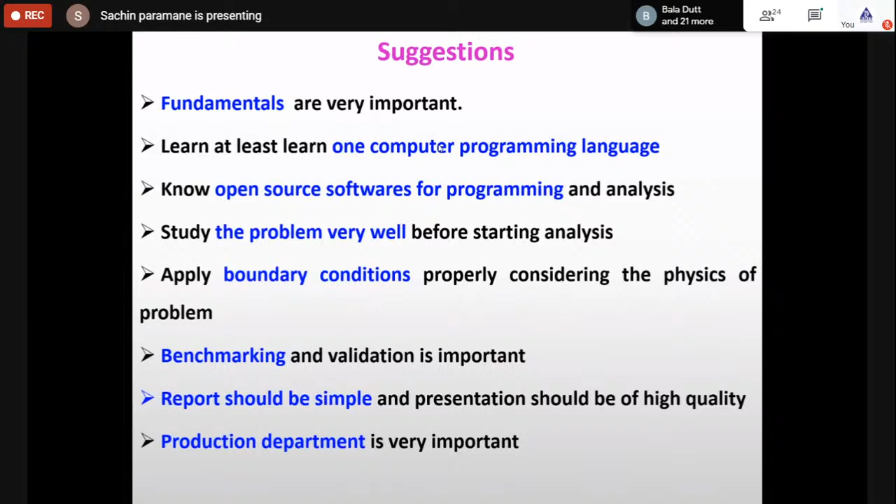So this is, I think, the end of the presentation now. If you have any queries, you can let me know. I'll be happy to answer those queries.